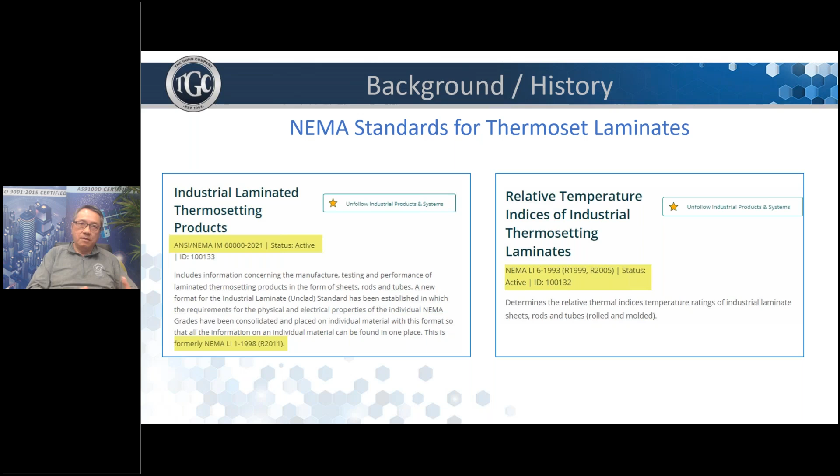Okay, the LI1 is the main standard of NEMA, which is now ANSI NEMA IM60000 2021. The key difference between the IM60000 and LI1: first, LI1 was not an ANSI standard. IM60000 is now an ANSI standard. ANSI stands for American National Standards Institute. So it is the American National Standard IM60000, and all the NEMA grades are now ANSI grades as well.

The other thing that I want to talk about today is that we have introduced new grades in the IM60000 standard. New doesn't mean that they were invented last year. They've been around in international standards. So we just brought IM60000 current with other international standards to reflect the advancement in the industry. And talking about international standards, we added to IM60000 properties both the SI or metric unit side by side with the US imperial unit to facilitate any comparison between NEMA standard, NEMA material, and international standards like ISO, IEC.

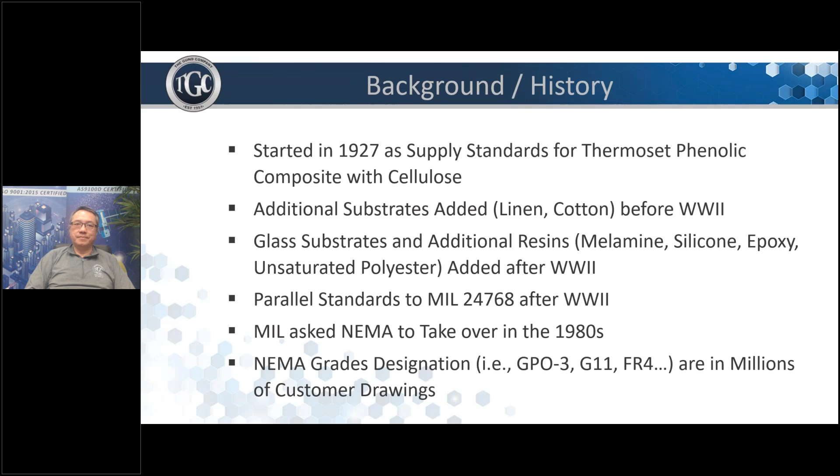So the standard applies to a layered composite commonly used in the industry. Nowadays, most people would call thermoset laminate thermoset composite. The reason why NEMA used the word thermoset laminate is that layering of B-stage or prepreg and then subjecting it to high temperature and high pressure was the original way of making thermoset composite and still a very popular way of doing it. So by saying laminate or composite, I'm talking about the same thing.

And one thing that I'd like to point out here is that there are other composite types that are used in the industry. They are not part of NEMA IM60000 now, and they will not be part of today's discussion. They are like filament wound tubes, BMC compound, or thermoplastic composites like filled nylon or filled polycarbonate. They are important materials, but they are not part of NEMA IM60000 at the current time.

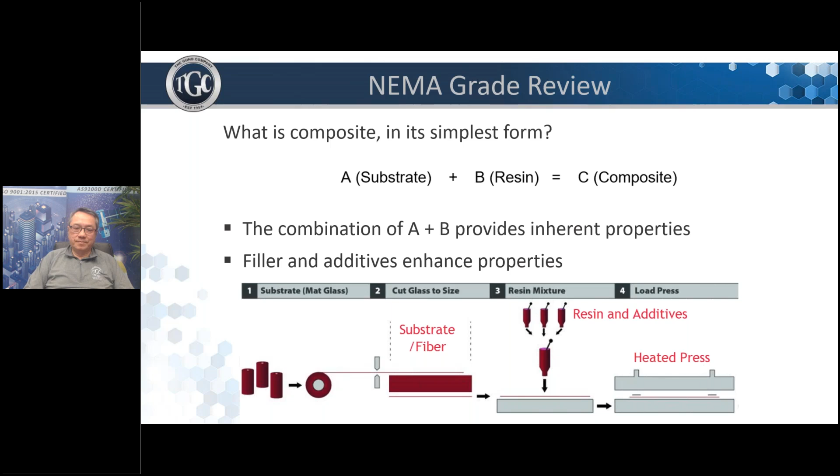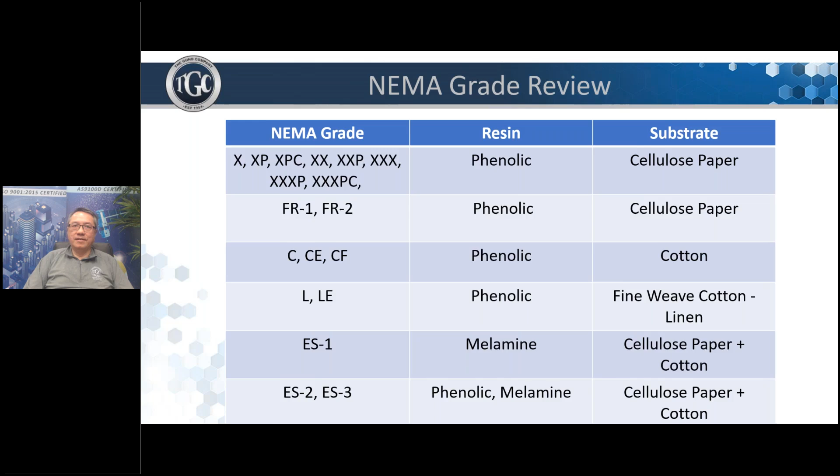NEMA grade, as I talked about before, started almost 100 years ago with phenolic material as the resin or the chemicals, and the substrate, the fiber, started with paper and then moved up to cotton or fine cotton like linen. After a few years, people realized that they want the material to be more fire retardant, so they started to add melamine in it. So melamine became a NEMA grade. Around the Second World War, people recognized that we need the laminated material to be stronger. So what is stronger than paper or natural material like cotton? Woven glass cloth. And that's why we have those glass grades G3 to G9.

After the Second World War, due to the advancement in the polymer industry, epoxy became very popular. So epoxy glass became a very popular NEMA grade. A bit later on, we have unsaturated polyester, and they are added to the NEMA grade also. In the 90s, the last two, CEM1 and CEM2, are special grades for printed circuit board. Obviously, that was popular in the 90s. Nowadays they've sort of gone out of fashion because the industry has moved on, but we kept them on as NEMA grade.

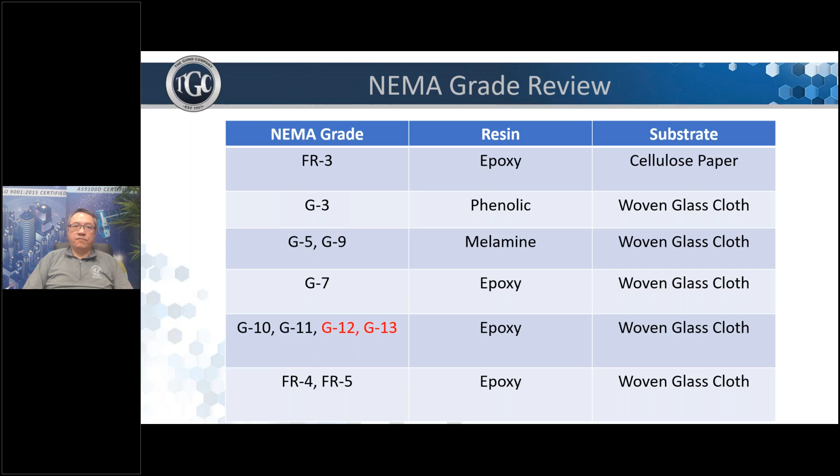If you look at it, some of the ones that I highlight, the G15, GPO5, G12, G13, are new NEMA grades in IM 60,000. They've been around for 10 years or more, and they have been in the IEC grade. Unfortunately, as I said, NEMA became very popular in the 1980s, but the last time it was revised was 1998. So we kind of missed the advancement in the industry, and that was another reason why we revised NEMA LI1 into IM 60,000.

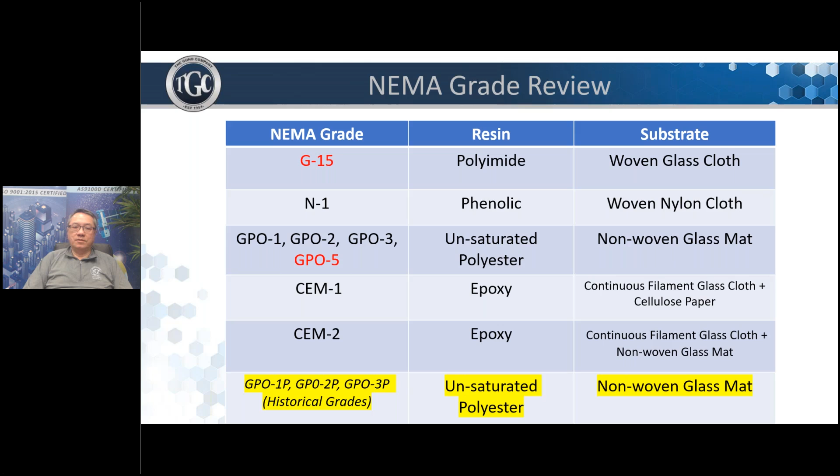Now we have our next poll question. What we really want to see here is what properties are most critical to you in your applications. You can select more than one, I believe, even though it says select one. If it doesn't allow you to select more than one, don't worry about it. Just select the one that's most important to you. We'll give you about 30 seconds to complete the poll. Okay. All right, very good. Sharing.

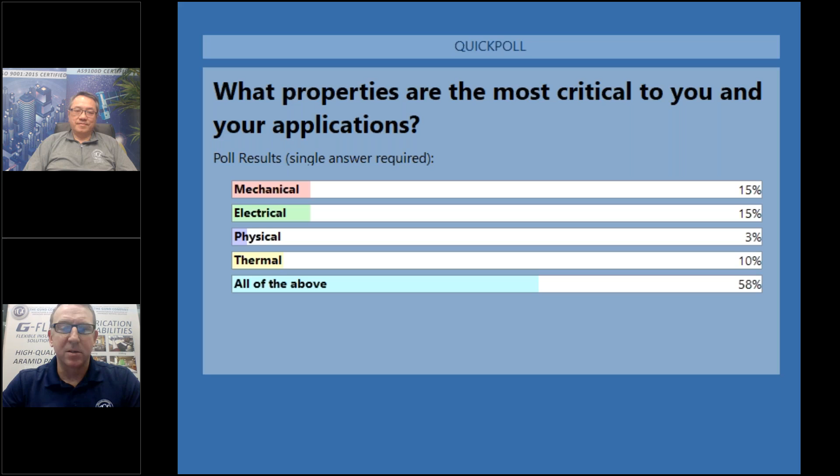It looks like, again, there's a good balance between mechanical and electrical, and some thermal characteristics that are very, very important to people. So again, it gives a good idea of where everybody is with their needs and their applications. Yeah, thank you, audience. We have a very knowledgeable audience, because that was what I was going to say.

NEMA, after all, is the National Electrical Manufacturers Association, so electrical properties are obviously important. And IM6 is the Insulating Materials Section, so we deal with insulation. We pride ourselves because insulation is a very important part of the electrical system. Without it, we cannot use electricity. A good example is the water pipe, because we need a water pipe to direct where the water flows. The same thing goes with the flow of electrons. It's the insulation that directs and controls the flow of electrons or electricity. And the example is Niagara Falls, as another way of looking at Ohm's law. Ohm's law is voltage divided by resistance.

Equal to current. So with Niagara Falls, the height of the fall is the potential, the voltage. The water flow is obviously like a flow of electricity or electrons. And then the resistance is rock. And if you build enough rock, you can actually stop the flow of electricity or the flow of water, like Hoover Dam.

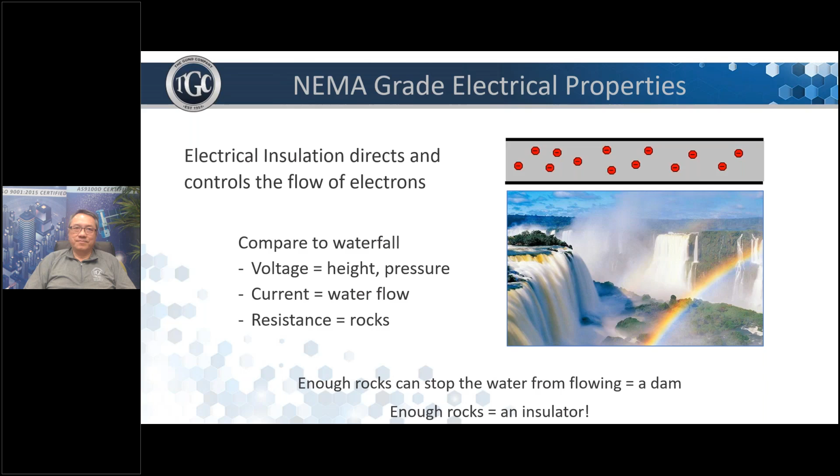So those are the situations where the material will perform best, like breakdown voltage. If that's critical, those are your choices. Arc and track resistance, again, those are your choices. Permittivity and dissipation factor. Again, if you worry about heat loss, if you worry about energy efficiency, those are popular choices.

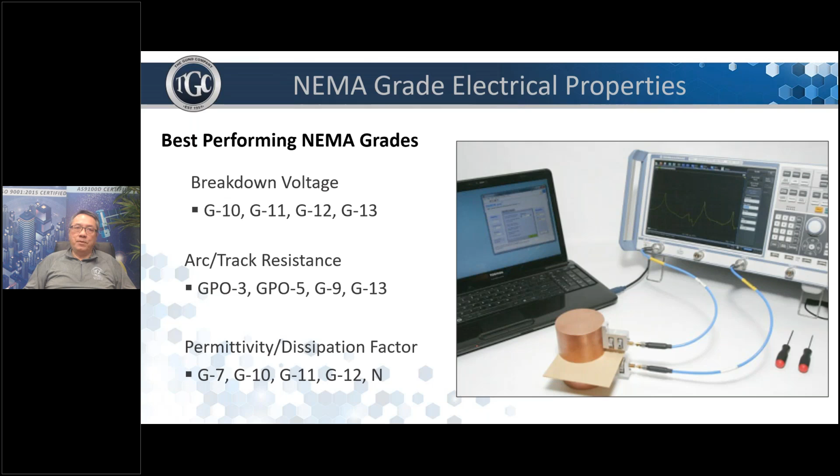The mechanical properties for NEMA grade material, in my opinion, are just as important as electrical. And the mechanical properties are primarily influenced by the type of substrate or fiber you use. Glass is obviously stronger than paper. Everybody knows how strong glass fiber can be. But the other thing that's very important is the orientation of the fiber to mechanical stress.

And that's why when NEMA published its standard, for all the mechanical properties NEMA would identify whether it's lengthwise or crosswise, perpendicular or parallel to the lamination, flatwise or edgewise, if we are talking about something like compression. So that's one thing that makes the NEMA standard very useful in design engineering: if you know your force is concentrated in a certain direction, you can select the right material.

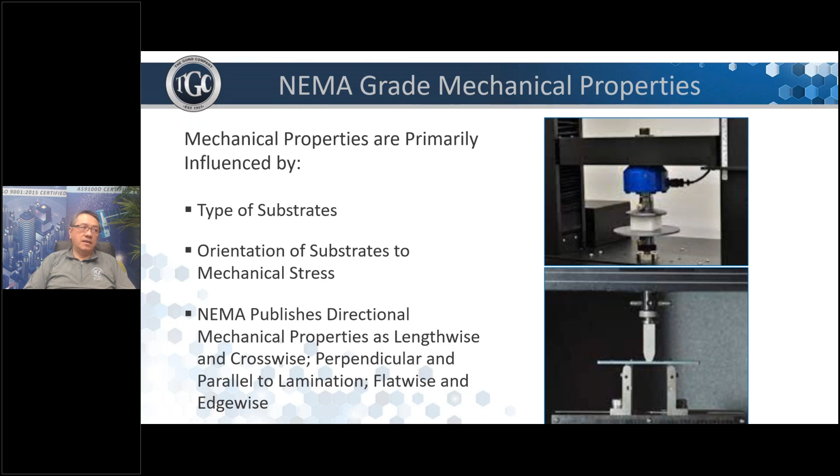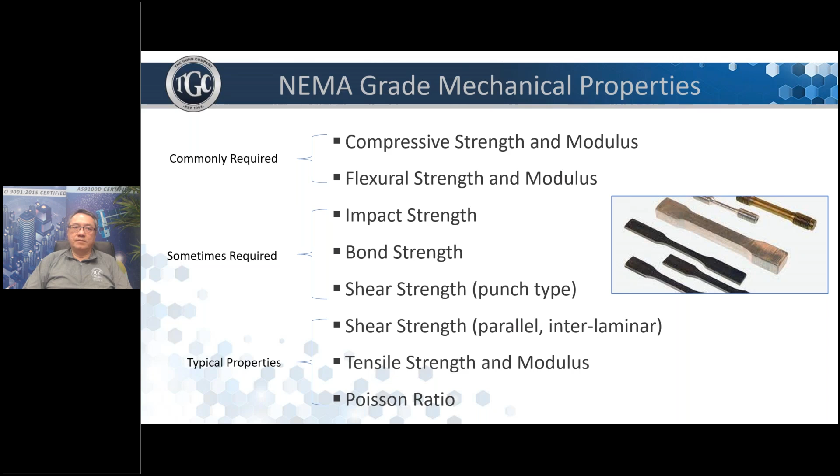Okay, the reason I put this pyramid is that I want to show how the different fibers affect the mechanical properties. S glass at the top of the pyramid has the strongest mechanical performance, followed by woven glass cloth, and cloth is stronger than glass mat, and paper, cotton, and linen are near the bottom. Nylon fiber is kind of weak, but the nylon grade is used for a very specific reason.

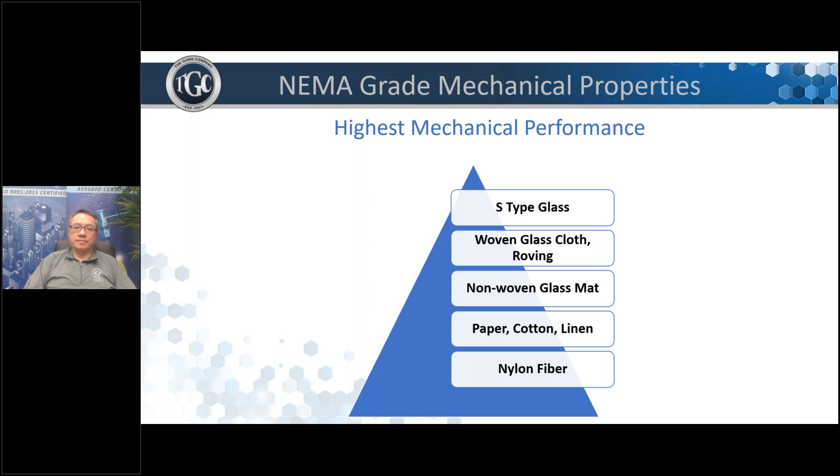So after mechanical properties, the third set of properties that the NEMA standard shows are what we call physical properties. Of all the physical properties, the most important one is probably water absorption, because we are talking about a standard for electrical insulation. Electricity and water don't mix too well. And on top of that, where components made out of NEMA material are exposed to high temperature and humid environments or hot water, water absorption would have an effect on the longevity of the components.

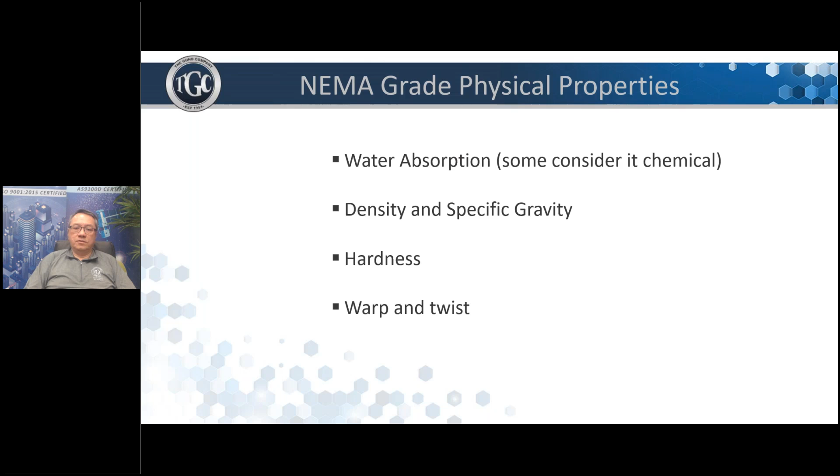Essentially, what prolonged exposure to high humidity does is degrade both the resin and the fiber through a chemical reaction called hydrolysis. And also the water film will form a boundary, and that will cause partial discharge at a certain voltage that's high enough, and that would affect the longevity of the insulation. So that's why water absorption is a very important physical property.

And of the NEMA materials, the silicone grade has the best water absorption performance, followed by epoxy, polyester, and phenolic. Those are the original NEMA grades. Obviously, glass absorbs less water than paper or any natural material.

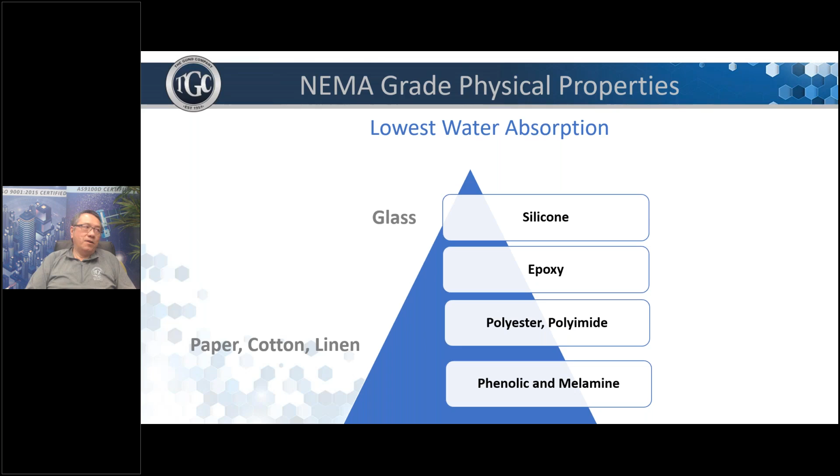And density is a fairly important consideration. In general, it's just a general rule of thumb: the higher the density, the stronger the material, because there's more material. But the other thing is that if all other properties are equal, the NEMA grade with the lowest density actually has an advantage in terms of weight, and that may be important for aerospace or even wind turbine applications. And usually the lower the density, the cost may be lower because you use less material.

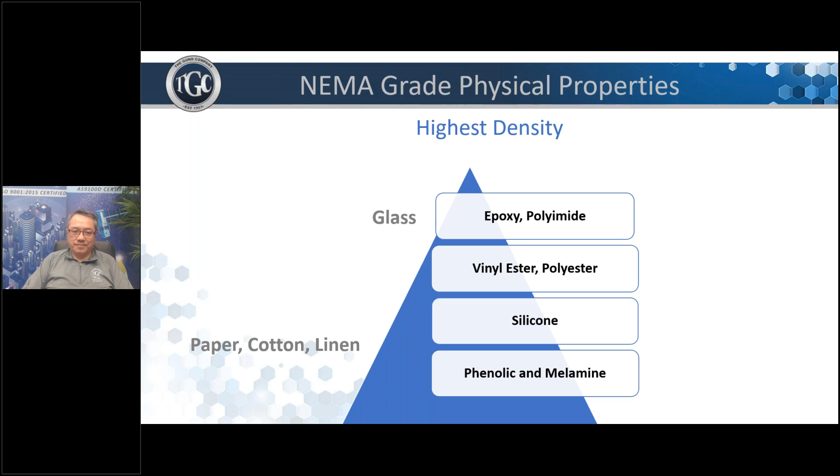Thermal properties. Yeah, we have a very knowledgeable audience here.

Room temperature property is one thing, but elevated temperature property is another thing. And on top of that, we need to talk about thermal endurance, or RTI, or the thermal class of the NEMA material grade. In large industrial machinery like generators, rotors, or dry type transformers, they operate at very high temperature, and they are expected to last for a long time. So that's what we call RTI, or thermal life property.

I don't have time to go through it in detail here, but in NEMA IM 60000 or LI1, for each material grade, the temperature class or the thermal index is listed, usually as a typical value. And where do those numbers come from? They come from the NEMA LI6 standard. NEMA actually has an entire different standard just to address the thermal properties of its thermoset laminates, which demonstrates how important it is.

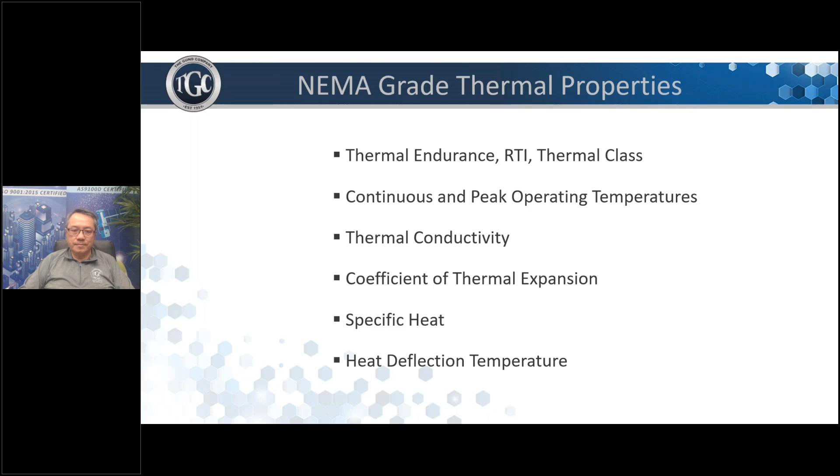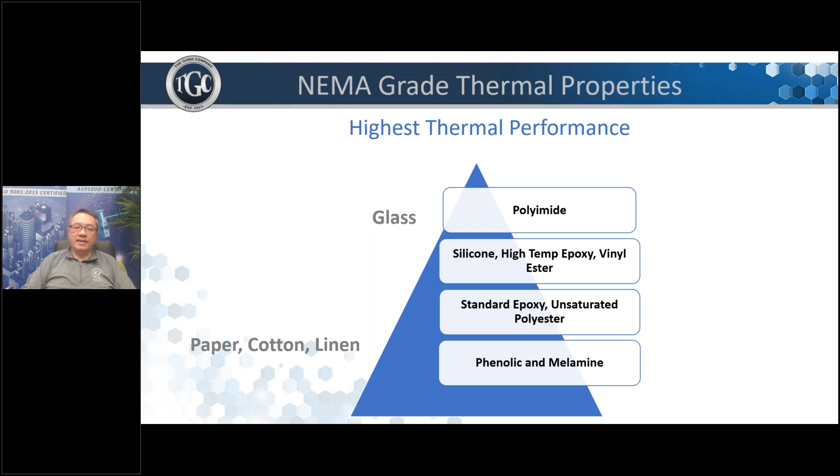So, of the NEMA grade materials, the polyimides are the ones with the highest thermal performance, followed by high-temp epoxy, vinyl ester, and then standard epoxy and standard polyester, phenolic, and melamine again at the bottom. Again, glass obviously has a higher thermal endurance than paper. Okay, I think this covers the last properties.

Chemical properties. Obviously, a lot of you in the audience know about flammability, UL94, and that is influenced mostly by the chemistry and the flame retardant additive. As a rule of thumb, polyimide has the highest chemical stability, followed by silicone, high-temp epoxy, vinyl ester, and then unsaturated polyester, phenolic, and melamine. Melamine is very good on flammability, but it's not chemically as stable as polyimide, silicone, and high-temp epoxy. Some high-temp epoxies will require a bit of additive to make it UL94 V0.

Last one, this slide looks familiar because this pyramid is the same as the last two that I've shown. Essentially, it's telling us that in this world, you have to pay for everything. So the high-grade material costs more money.

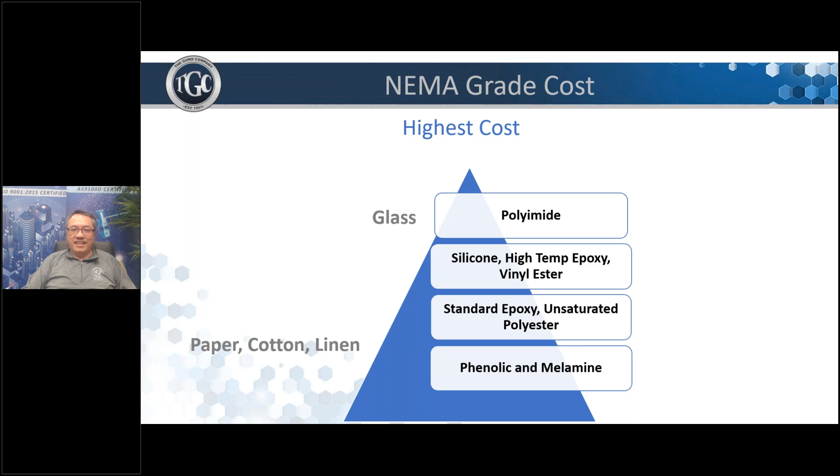Okay, I would like to go through the new NEMA grades. Start with G12. Everyone knows the NEMA temperature classes: Class B, G10. Class F, G11. G12, what is it? It's a Class H, 180 degrees C, NEMA glass epoxy. And then there's another one called G13. If you look at it, G13 is Class H also. But what makes G13 special over G12?

In case you need very high track resistance: in our industry, there's a test called the CTI test, and it's very hard to get to 600 volts. The G13 material meets the 600 volt CTI, and it is also used in Europe for railway applications because of its smoke and toxicity grade. And we have tested the G13 material and found that not only does it meet the European EN 45545, it also meets the North American NFPA 130.

G15, this is the polyimide, a very expensive material, but it outperforms any of the glass grades at extreme temperature. Look at it. Class R is 220 degrees C. It retains 60% of its room temperature performance when you test the material at 220 degrees C, and it retains half of its room temperature performance at 260 degrees C. And that's indeed a very high temperature.

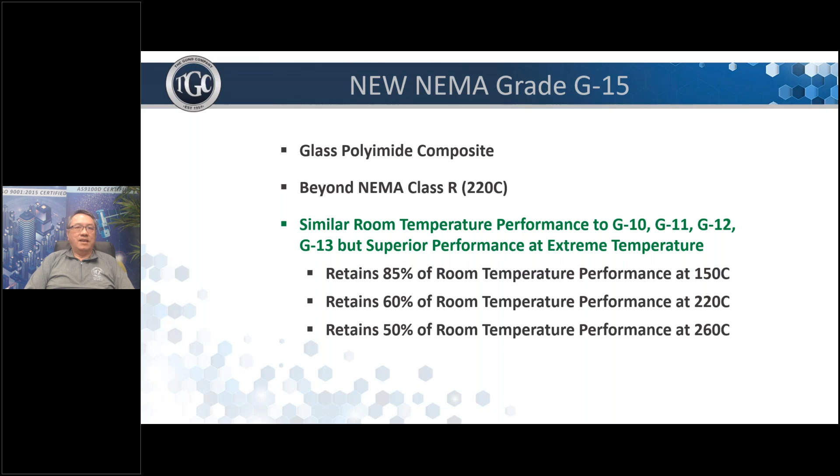Last one, this one is called GPO-5, under IEC UP GM 205. It is a high-strength glass mat polyester laminate with mechanical properties approaching that of a glass epoxy grade, but maintaining the GPO-3 flame, track, and arc resistance. If you look at the comparison between GPO-3, GPO-5, and G11, it is actually much closer to G11 than GPO-3. It's a bit more expensive than GPO-3, but it's very cost competitive with G11.

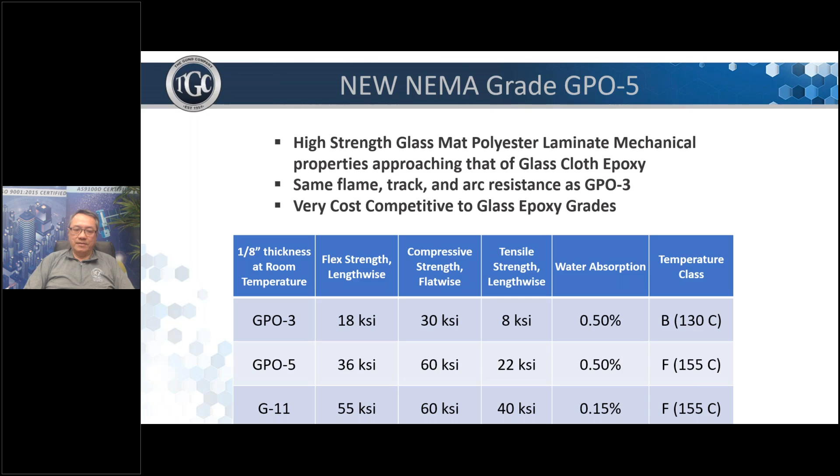So, lastly, now that we've talked about all the NEMA grades and all the properties: I'm a product design engineer, I have a specific application. How do I know which one to use? So first, we have to identify what the critical properties in the application are. Is it electrical? Is it thermal? Or is it mechanical, or a combination of all of them?

And then we look at the available NEMA grades for the best options. And obviously, what we learn from a standard is one thing. We have to get some material and perhaps make some actual components for testing. So we are talking about both material testing and prototype testing. And once it passes those stages, then we will want to do some application engineering testing. It can be an accelerated life test, or it can be full-fledged end product testing.

And then there is always the question: I don't see the property that I need in your NEMA grade, so what am I supposed to do? And there are other questions, like: I think my material or my component is subjected to a combination of stress. It's not just compression, it's compression and flex. So how are we going to test it? Okay, we test it in the prototype.